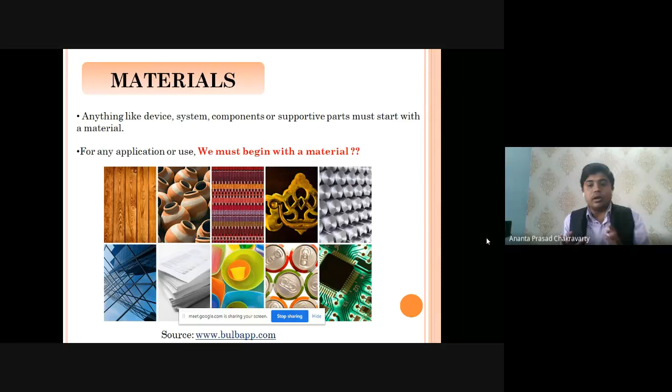So now let us begin today's topic, the emerging trend of research in material science. First of all, I must focus on material science and different classes of materials, basically for the graduating students. So first, what actually are materials? As I have told, to begin anything, you first have to search for a material. First, you have to choose your material. Then you have to select what design to give. Hence, material is the first criterion for us. Whether it is electronic, electrical, civil, infrastructure, or any kind of thing, you have to go for a material.

Now, what materials do you have to consider for different applications? First of all, you have to know the design criteria, in what applications you have to use it. Then what property do we need? Let us consider we have to construct a building. Then the roof must sustain a certain amount of load. Considering that, you have to choose your class of materials. Then the duration is important. You have to consider up to what duration you want it, and the safety factor.

It is a very crucial parameter, and environmental issues: in different environmental aspects like different humidity, high temperatures, or high to low temperatures or low to high temperatures, whether that material will sustain or not. So keeping this in mind, you have to think about what material you have to consider for which applications.

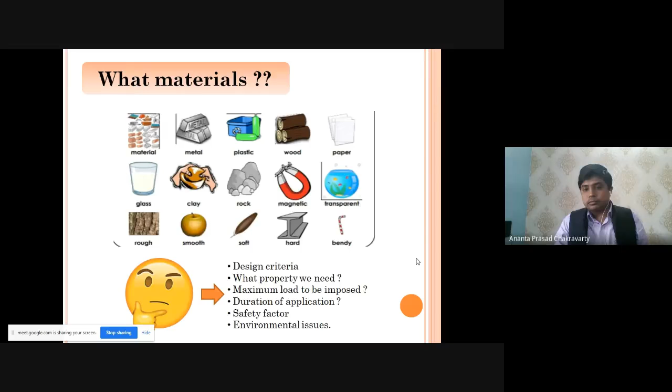Basic concepts of materials: it originated from the word matter. Matter is the substance or the mixture of substances that constitutes an object, and it may be from living or non-living matter. Materials can be classified with respect to their different physical or chemical properties, geological origin, or their biological function, their different appearance or their different availability. You can classify the materials.

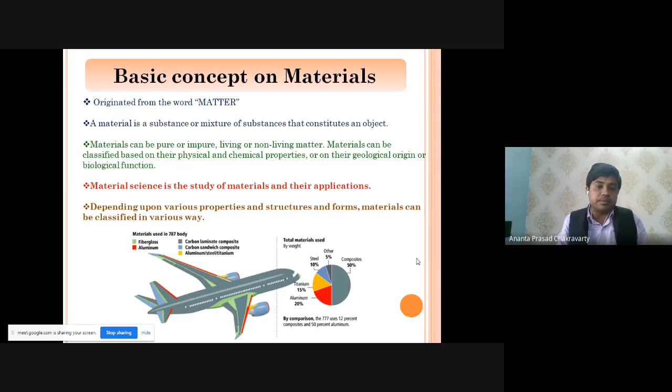So the study of materials is known as material science, and when you use these materials in different devices, that branch is known as materials engineering. So basically there is no such difference between materials engineering and material science. I have given a clear-cut figure of how much titanium, aluminum, steel, and other classes of materials are used in an aerospace body, in an aeroplane, keeping the different applications in mind.

So now we should classify the matter first, then we have to go for materials. Matter may be classified with respect to physical classifications like solids, liquids, gases. Basically we should focus on solid materials. Liquids and gases no doubt are materials, but I have not focused on them in my presentation.

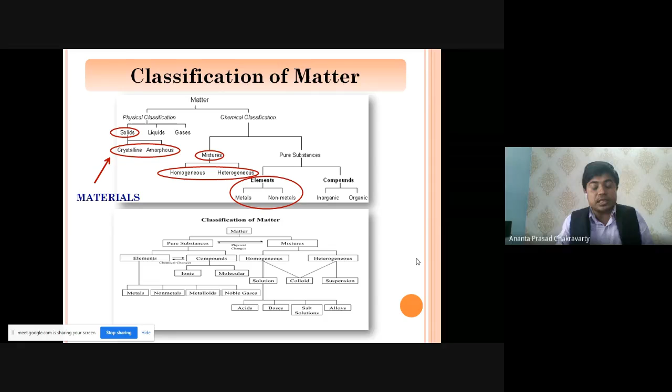Solids may be classified as crystalline and amorphous, and with respect to chemical classifications, materials may be classified as mixtures and pure substances. Mixtures may be homogeneous or heterogeneous, and in different classes of elements you may classify metals, non-metals, polymers, ceramics, etc., as our principal sir has already elaborated.

So now let us classify materials in a broad aspect: polymers, metals, and ceramics. Polymers are generally amorphous in nature; in the forthcoming slides I will explain what that is. Metals are crystalline, and ceramics are a mixture of amorphous and crystalline. When you mix all three, or two of those phases, in the required proportions, you reach composites, and those composites have better properties than conventional polymers, metals or ceramics.

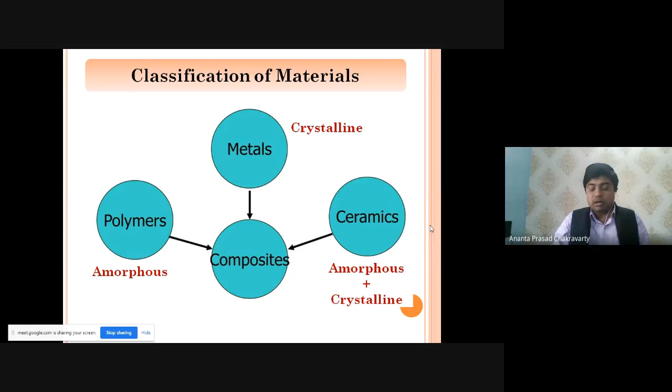Now, what are metals? Metals are generally crystalline in nature. In this case, the lattice arrangements are purely periodic. What are those lattice arrangements? All the atoms arrange in a periodic fashion; those are known as lattices. Lattices are of different types. I'm not going deeper into this; it is in your courses of study, or you may consult any book.

In crystalline materials we see one type of lattice arrangement, but in polycrystalline materials, different lattice arrangements collide and intermix, so they have their own boundaries, and those boundaries are known as grain boundaries. The example is quartz. In crystalline, the examples are sodium or any kind of metal.

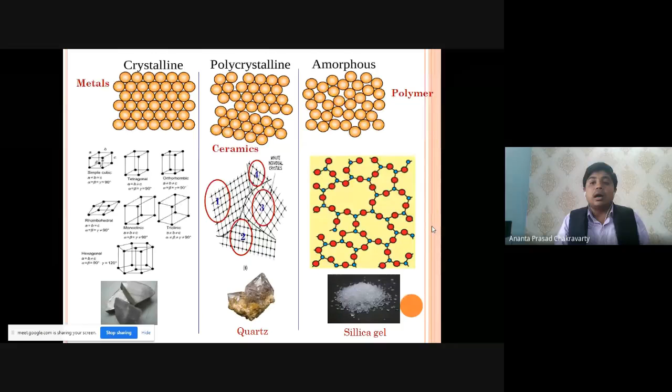In amorphous materials, there is no such lattice arrangement, and the atoms are cross-linked together to form a chain. These are polymers; we have different types, liquid state polymers, solid state polymers, and conducting polymers too, but basically they are cross-linked to give their overall solidification.

Now, if we construct a material tree, the branches will be metals, ceramics, polymers, and composites. The sub-branches of metals will be ferrous metals, originating from ferrous alloys like steels or cast irons. Similarly, other sub-branches will be aluminum alloys and copper alloys, and for different alloys you can assign their sub-branches, leaves, and properties.

Similarly, for ceramics, the sub-branches will be engineering ceramics like barium titanate, alumina, and different kinds of ceramics, and traditional ceramics like stone, porcelain, and quartz.

Similarly, polymers will be of thermosets, which generally cure permanently. Once it is cured, you cannot revert back to its original liquid state. Okay. Similarly, thermoplastics are cured partially. When it is cured and you want its liquid state, then you will give some heat or some temperature, and it will revert back to its original state.

Similarly, elastomers are also one of the branches of polymers. And mixing all of them in suitable combinations by some mixing rule, we will reach the material that is known as composites. When you keep the emphasis on metal, that is known as metal matrix composites. When you keep the emphasis on polymers, that will be polymer matrix composites. And if you give the emphasis to ceramics, those will be ceramic matrix composites. Basically, I will give importance to polymer matrix composites in part 2 of my presentation.

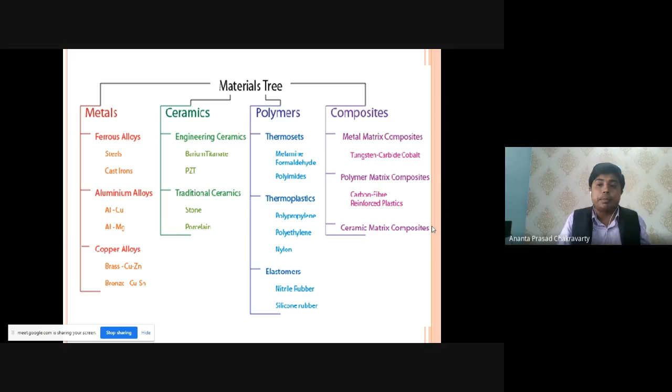Now let us get a glimpse of different classes of materials. Let us start with metals. These are generally polished, fractured, and have a lustrous appearance. These have high thermal and electrical conductivity. These are generally ductile and have high strength. And generally in our day-to-day life, we are using metals. Okay. And typically these are crystalline arrangements. Examples you can see in the slides: aluminum, iron, etc.

But the basic problem with metals is that they exhibit a catastrophic nature of failure. Catastrophic nature of failure means it fails instantly, and it does not give any warning. So during use you have to be very careful about it. Then it can corrode. When you keep a metal like iron outside in some environments, it has some corrosion. Then in metals, the very big trouble is the formation of cracks. You cannot avoid the formation of cracks. Then in extraction from mining, we cannot get pure metal. We get it in the form of ores, and it's a very difficult process to extract those metals. Mining processes are also very difficult.

So keeping this in mind, the emerging trend of research is to mix different metals to form alloys for different applications, like bronze and steels. All these are different alloys. And improvement of polishability is important so that it can be used, and its fracture strength must be improved so that no cracks are formed. And improvement of fatigue property.

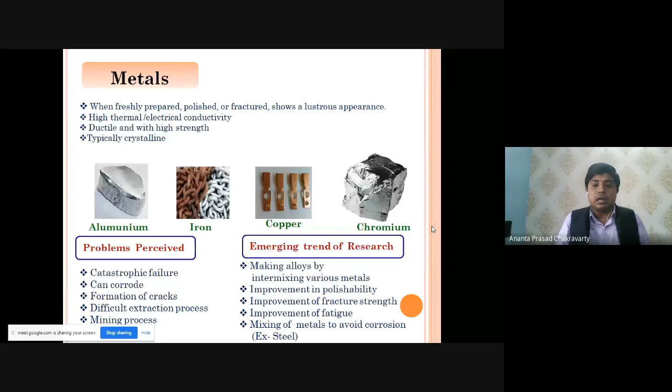What is fatigue? Whenever you are using a metal and giving some load, then after a certain time you unload it. The load is removed. Then you continue this cycle so many times. After a certain number of times, the metal will not respond to this cycle of loading and unloading, and at the end it will fail. That is known as fatigue. And you must not cross its endurance limit. So mixing of metals to avoid corrosion is also an emerging trend of research in metals.

Similarly, we come to ceramics. These are generally solid materials comprising inorganic compounds of metal or metalloid, and there are natural ceramics like earthenware, porcelain, bricks, and ceramic bricks you are using, and these are generally brittle in nature. They break immediately. High Young's modulus, high strength, high corrosion resistance, it will never corrode, and high thermal resistance also. For this reason, ceramics are used in blast furnace applications. They have very low electrical conductivity and low thermal conductivity. Hence, in some furnaces, ceramic parts are used for insulating purposes.

They are amorphous and polycrystalline in nature. Different examples are silica, alumina, zirconia, silicon carbide. Here also you may face the problem of catastrophic nature of failure. It can break easily, with formation of cracks. You have to avoid all those things by some research. You have to mix some metals with the ceramic so that the ceramic can sustain. Then you have to avoid formation of interconnected cracks, and you have to improve its fracture strength,

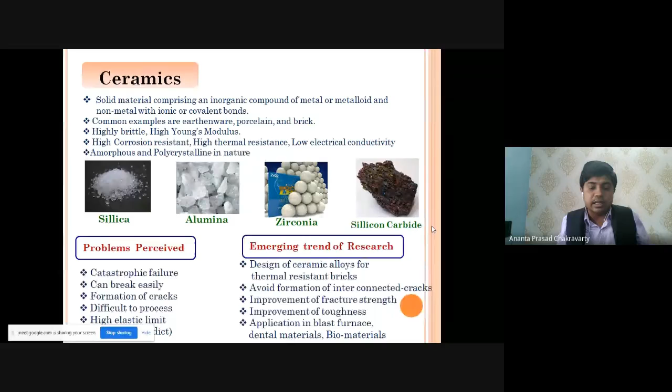its toughness, and basically how these ceramics will be used in biomaterials and dental materials. These are related to biotechnology, and botany and zoology people can research in this area. So these are some basic research areas in ceramics. Now the polymers.

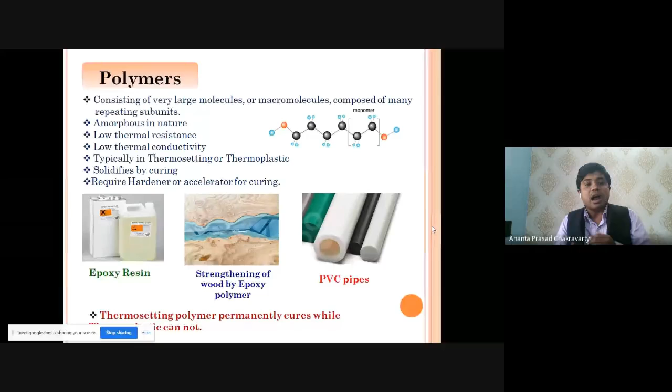Now, advantages with polymers: these are very good adhesives. These are also very good coating materials, and you can process polymers easily. You can apply them anywhere, like with a brush. Less maintenance cost, they will never corrode, and very high life cycles.

Now, the disadvantage is that polymers generally absorb moisture, and moisture is the big detrimental factor for polymers: they swell, and through the process of hydrolysis they degrade. These have low elastic modulus and low glass transition temperature, which is generally known as the maximum service temperature, after which the polymers generally plasticize and give plastic property, and the yield strength, strength and sustainability also decrease.

Low processing time, cracking; after curing, hardening or solidification, these generally break under high amounts of load. So you have to go for the design stress, up to what amount of stress or load you have to use it.

So keeping this in mind, the emerging trend is how the moisture can be removed, or how we will design polymers. They should absorb very low moisture content, having high mechanical property, conducting property, high glass transition temperature, and you have to mix some ceramics or metals in polymers to have better composites for better properties, and those can be used in various structural and civil infrastructure applications.

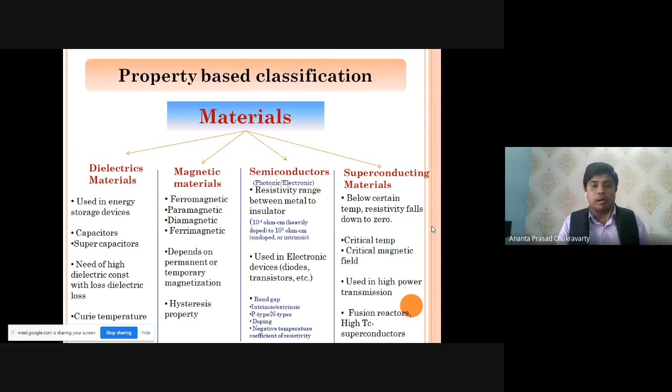School level students know what Coulomb's law is. And Hendrik L. Lorentz for the Lorentz theory, which is also the modification of electromagnetic theory in relativity. They have given their valuable time, and using these theories we can classify the materials. Now let us start with the dielectric materials.

Dielectrics are electrical insulators, and whenever you apply an electric field they can be polarized, meaning that dipoles are oriented in a proper direction. That is known as dielectric polarization. With respect to different extents of dielectric polarization, you can use these dielectrics in capacitor plates, and you can also change the capacitance by changing these dielectrics, and reduce the possibility of shorting out by sparking during high voltages. So applications will be in capacitors, transformers and different applications.

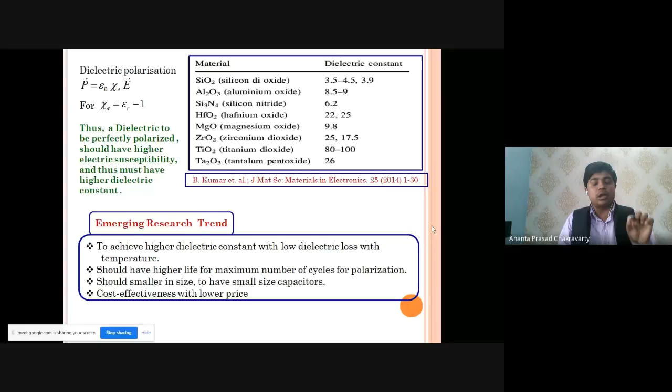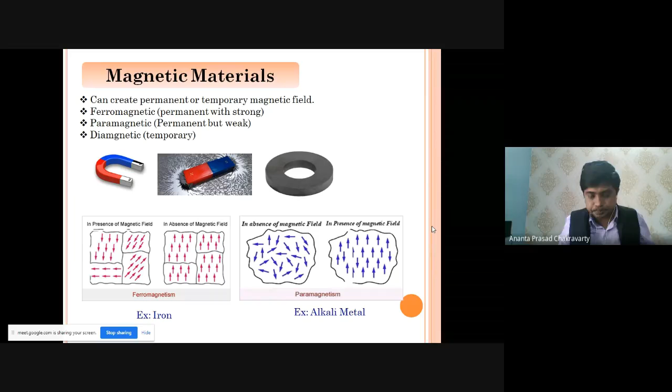Similarly, if we come back to magnetic materials, they can create permanent or temporary magnetic fields. That may be ferromagnetic, permanent and strong; paramagnetic, permanent but weak; and diamagnetic, which is temporary. So you can classify different classes of magnetic materials. For ferromagnetic, below critical temperature, their spin vectors are aligned parallel in magnetic domains. For antiferromagnetic, their spin vectors are aligned antiparallel. For ferrimagnetic, the spin vectors are aligned antiparallel but do not cancel. And in paramagnetic, spin vectors are randomly oriented.

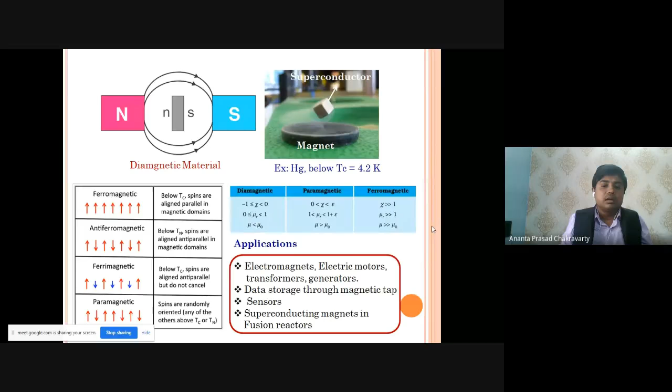Keeping this in mind, you can use them in electromagnets, electric motors, transformers, data storage in magnetic tape, sensors, and superconducting magnets in fusion reactors. And the hysteresis loop plays a very crucial role for magnetic materials. Whenever you start from the origin, where you have not applied a magnetic field, and then apply the magnetic field, it will give an S-type of cycle.

This hysteresis loop can be measured with different equipment, and there are some emerging research trends: you have to achieve uniform magnetization at various temperatures, and critical temperatures must be improved so that a magnetic material can be sustained up to very high temperatures. Particle size or grain size must be smaller with higher magnetic polarization, and to prepare magnetic materials, the intermixture of various non-magnetic materials must be considered. How to prepare those mixtures is also an emerging research trend, and it is obviously challenging to prepare sensors using magnetic materials.

Now we reach superconductors. When you cool a normal conductor, for some specific materials, not all classes of conductors, like mercury, below 4.2 Kelvin its resistivity will decrease to zero, and below that temperature its conductivity will be very high, practically infinite. Hence these are known as superconducting materials. They exhibit the Meissner effect, meaning below the critical temperature they exclude the magnetic field completely, and they are used in fusion magnets, power transmission, superconducting sensors, etc.

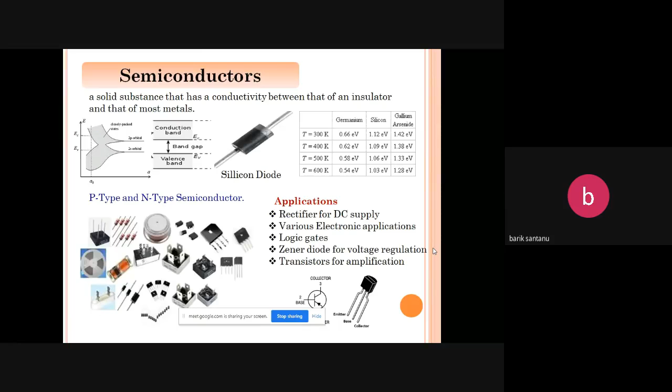Sir, screen dekha jauni screen. Excuse me, sir. Dekha jauni screen. Screen already it is stopped sharing. It is Sukanti madam. Should I stop and share it again? Let us, I should stop and share again. It is clearly visible. Now the screen is visible. Yes, sir, it is visible, audible and visible. Okay, thank you, sir. Those who cannot see the screen may ping out so that the screen can be visible.

I hope so. Then in applications, by combining those p-type and n-type materials, you have the p-n junction diodes. Those are known as rectifiers. In day-to-day life we are using them to charge our mobile phones; those charging devices are actually rectifiers. Similarly, transistors, field effect transistors, and different classes of logic gate materials are generated from these semiconductors. And without semiconductors, your electronic devices would not be possible.

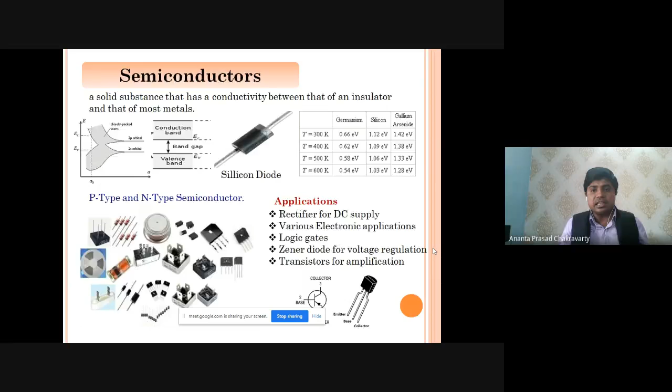So, hence, the emerging trend of research will demand semiconducting materials with lower band gap, lower resistivity, smaller size, some luminescence, high light cycles, and very good responses towards transitions. Then there is another class of materials known as optical materials. These are also semiconducting materials. I have not mentioned them in the list, but these have optical properties.

Whenever you give some light, there will be some transitions. From valence band to conduction band, the charged particles will transit. They will be excited. This is known as photonic excitement. Photon is the particle associated with light, and hence it is known as photonic excitement. For this kind of property, those materials are known as photonic materials, or optical materials. And these materials have direct band gap property. What is direct band gap?

Now you can see in the figure, this is the valence band, and this is the conduction band. All the holes will be here, already densified, and here all the electrons will be densified. All these valence band and conduction band are at the same energy state. But see the second figure: the maximum peak of the valence band and the minimum peak of the conduction band are at different energy states. Generally optical materials exhibit this kind of graph, that is, direct band gap property.

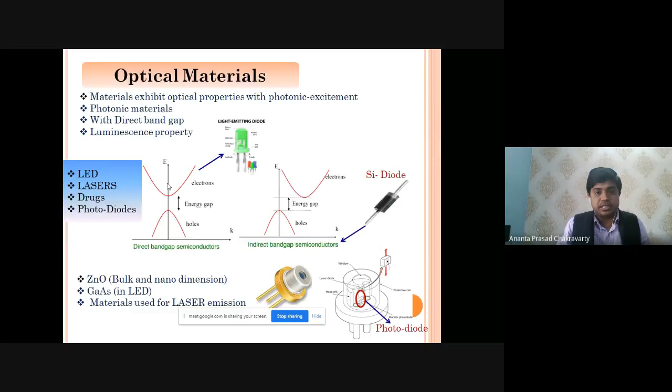I have already shown that you can use a UV-visible spectrometer to get the graph of absorbance versus energy. At a certain energy your absorbance will show greater transitions, and by finding the tangent to the x-axis, that point is known as the band gap, optical band gap or direct band gap of that material.

Whenever that direct band gap is, let us say, 3.2 electron volt, you have to give light of 3.2 electron volt. When you give light of energy 3.2 electron volt, the material will behave as a semiconducting material. So hence you have to enhance its photonic band gap, meaning the band gap must be reduced, and various lasing materials have to be in the pipeline for research. People are searching many materials to give the cheapest lasers.

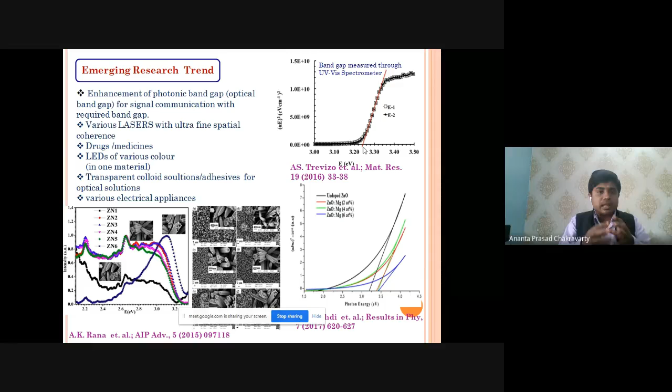Drugs, medicines, light emitting diodes for a single material with different colors, and transparent colloid solutions and adhesives, so that whenever you are jointing some lenses, like Canada balsam, it has some transparent properties, and various electrical appliances also. And I have cited so many kinds of things.

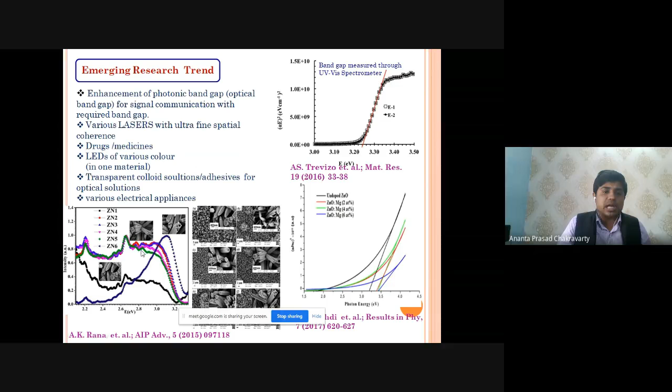See this diagram, at my mouse pointer. You can see that whenever you add zinc oxide with magnesium at 6 percentage, the blue line, its band gap will be improved. Its band gap is increased. And as you know, in the different kinds of microstructures for zinc oxide, you have different luminescence properties, and with a different luminescence property you can use that zinc oxide for different electrical applications. So what you need, you have to go for. That is the basic art of material science.

So now you can classify materials with respect to their particle size also. When their particle size is beyond 100 nanometer, that is known as bulk phase materials. When your particle size is less than 100 nanometer, that is known as nanomaterials. You can see barium titanate in bulk phase and in nano phase, and in nano phase its hardness and all its mechanical properties, electrical properties, optical properties are greater with respect to bulk phase. Hence it is better, we must go with nano phase materials.

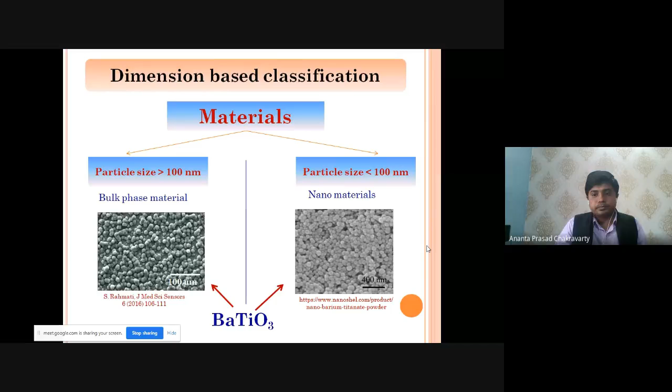Now you can classify nanomaterials with respect to different dimensions. First of all, you can fabricate nanomaterials by segmenting a bigger material into smaller and smaller sizes. That is known as the top-down approach. And also you can join very small materials or atomic level materials up to the 100 nanometer range, that is known as the bottom-up approach.

Keeping this in mind, when the material dimension is limited to a point, that is known as quantum dots or clusters or zero D. When the material dimension is confined to one axis, x axis or y axis, those are known as one dimensional materials. Examples are nanotubes, nanorods, nanowires. Similarly, when the nano dimension is confined to some thickness in x and y, that is known as two-dimensional nanomaterials, known as nanofilms or nano coatings.

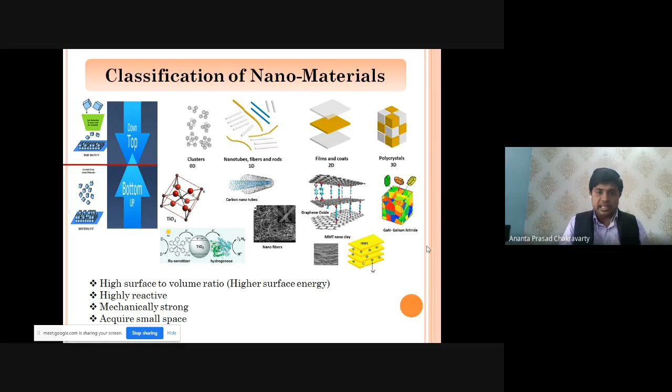Similarly, if the nano dimension is confined to three dimensions, that is known as polycrystalline nanomaterials or bulk phase nanomaterials, that you can grow for whatever applications you need. In that way, you have to go for the dimensions and for those techniques to fabricate nanomaterials.

So now the important classes of nanomaterials are carbon nanotubes, where the carbons are bonded in such a manner that they form a tube. Similarly, in a bigger tube a smaller tube, then in the smaller tube another, just imagine, that is known as multi-walled carbon nanotube, and if it is only a single cylinder, that is known as single-walled carbon nanotube. Similarly, if we cut one part of the carbon nanotube, it will be a sheet, and that is known as graphene sheet.

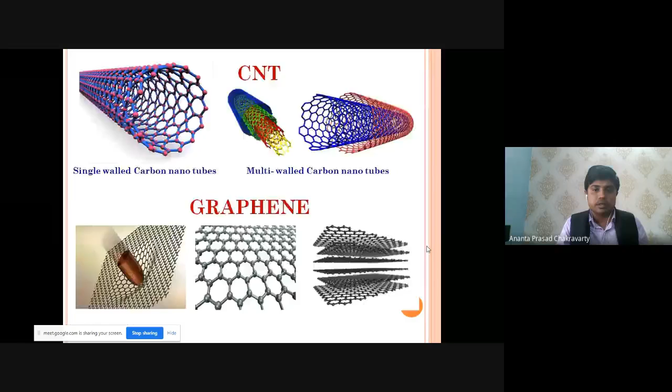It is so hard that a single atomic layer of graphene can sustain more than 1 ton of load. That is a very important emerging class of materials. Now people are going for it. So in the emerging trend of nanomaterials, people research to generate nanodielectrics, nanomagnetic materials, every kind of material in nano dimensions. And hence nanotechnology is just a blessing for the material scientist.

Now we have to go for another class of materials. Those are very important classes of materials, known as nuclear materials. Nuclear materials can emit radiations. These are by nature, and different radiations are there: alpha particle radiations, beta radiations, which are generally electrons, and gamma radiations, which are electromagnetic waves.

And in the periodic table I have shown the radiation cycle of uranium and how it will radiate, and at a certain time interval its mass will be decreased. That is signified by its half-life period, that is 0.693 by lambda. Lambda is its rate constant.

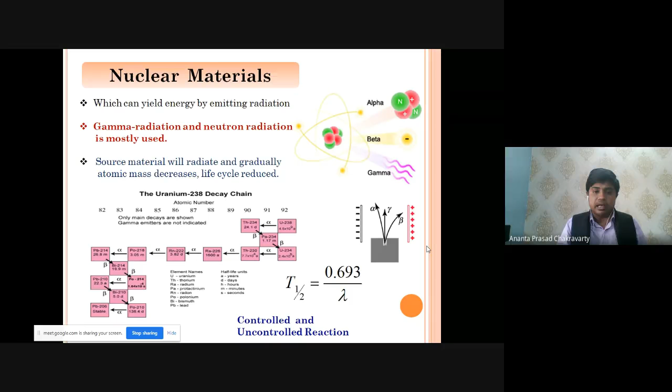So with this kind of materials, you can produce X-rays, lasers, plasma, gamma radiations, neutron radiations, and these classes of materials are used in reactors to produce electricity. In the emerging research trend, you have to design this kind of material with very optimum safety factors, because it may be hazardous for your health also.

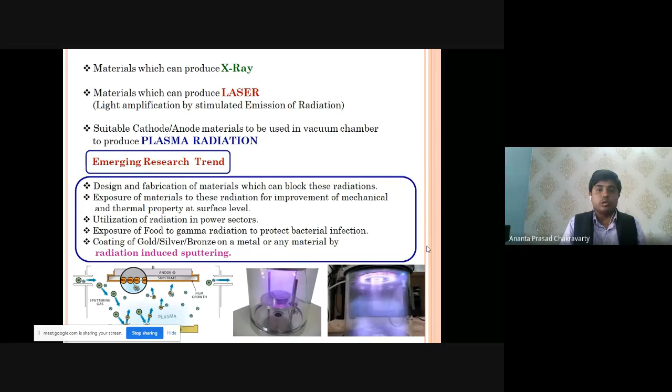Then people are searching how we have to block these radiations, but we have to keep a research on these classes of materials. That is also a very important class of materials. Plasma is also one kind; you can generate the cathodes and anodes so that plasma can be generated. Those are also in the classes of nuclear or radiating materials.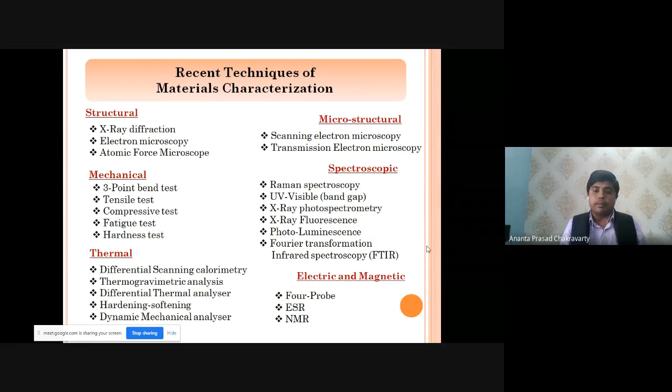Now let us begin with part 2 of my presentation, that is an emphasis on polymer composites. That is my research area; I have given my time to polymer composites from my MTech and PhD, and nowadays I am continuing with this kind of activities. Now, basic concept of composite materials. What are composite materials? We have to know. Already I have told it.

If different classes of materials are mixed together with a clear-cut interface, then the main part of the material, known as matrix, will give you some shape and size, and the other part, which will enhance the strength or property of that material in any way, is known as reinforcement, because it reinforces its properties. When these classes of materials come together with an interface, they are not alloys. They have a certain interface; that is known as composites. For example, concrete, cement plus sand plus rock, is a composite. Similarly, brick, soil plus sand, is also a composite. In wood, cellulose plus lignin, those are also composites.

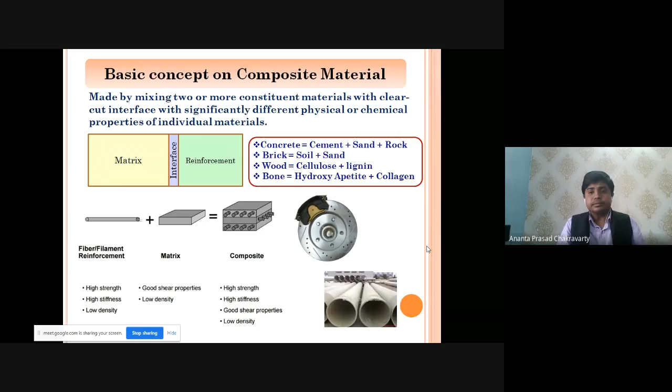Now these are some components of the composite, matrix and reinforcements. Already I have told you what properties the matrix should exhibit and what properties the reinforcement should exhibit. Generally reinforcement should have better strength than the matrix. So whenever you are using polymer, which is softer in nature, you have to choose either metal or ceramics for the reinforcement. Whenever you are choosing metal as a matrix, the higher strength material than metal is ceramics. You have to choose only ceramics.

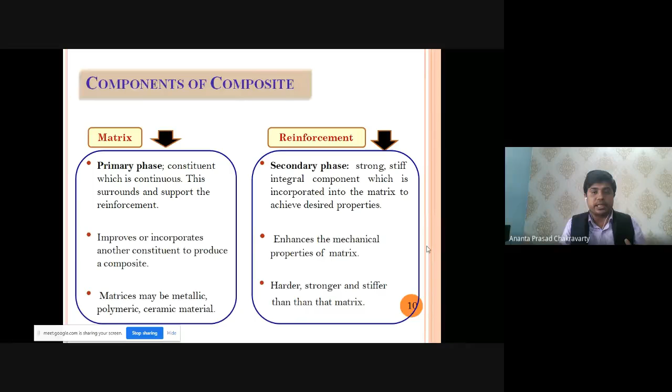So in this way, there is a rule of mixture. There is a mixing rule. Keeping that in mind, you have to mix at an optimum percentage, so that the composite material will give you the optimum strength and desired properties for that component. Now composites can be classified with respect to different kinds of matrices: polymer matrix composites, metal matrix composites, and ceramic matrix composites.

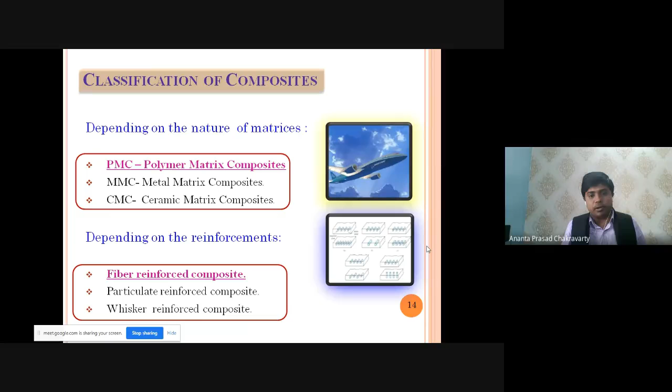I'll put emphasis on polymer matrix composites, and depending on reinforcements, it may be fiber reinforced composite, particulate reinforced composite, and whisker reinforced composites. So now the matrix may be metallic like aluminum, magnesium, titanium, or it may be ceramic: silicon carbide, silicon nitride, alumina, zirconia. The matrix may be polymer. So when you are choosing polymer as a matrix, you have to choose the upper classes of materials, metallic or ceramic materials, as their reinforcements.

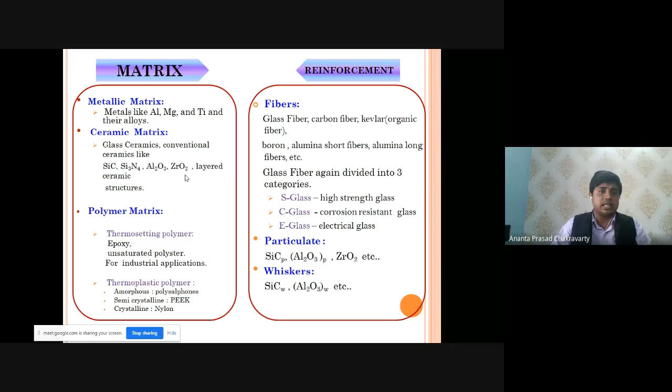And reinforcements may be in different sizes, like fibers, particles, or short fibers. So whenever you are choosing polymer as a matrix material, that is known as polymer matrix composites. Then in this case, you have to choose basically a ceramic as the reinforcing material. So in ceramics, you may choose particles or fiber form. So basically, I have taken the reinforcements of ceramics in fiber form. Hence, it is known as fiber reinforced polymer composites, that is, FRP composites.

So here, fibers may be taken from glass, carbon, Kevlar or alumina. So different classes of fibers you may fabricate and incorporate in the polymer to have better properties. Just see the stress strain diagram of a composite material. The blue dotted line is for matrix. See how very minimum strength, the cross mark is here, how much lesser strength the matrix has. And see the sole reinforcement, how brittle it is. It is a stiffer diagram, there is no plastic deformation, so it may break anywhere.

But whenever you are combining these materials of the red stress strain diagram and the blue stress strain diagram, it is giving the intermediate stress strain diagram between red and blue, that is the green. The strength is quite decreased, but its ductility is improved, its yield strength is also improved, and with certain plastic deformation points, so it has improved properties over the fibers and the matrix. So that means composites have improved properties over the fibers, or the reinforcements, or the matrix.

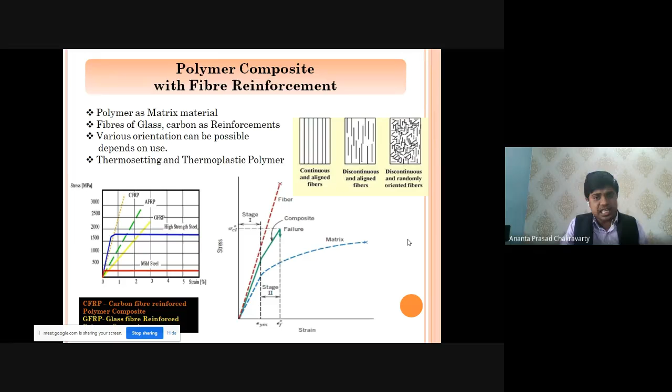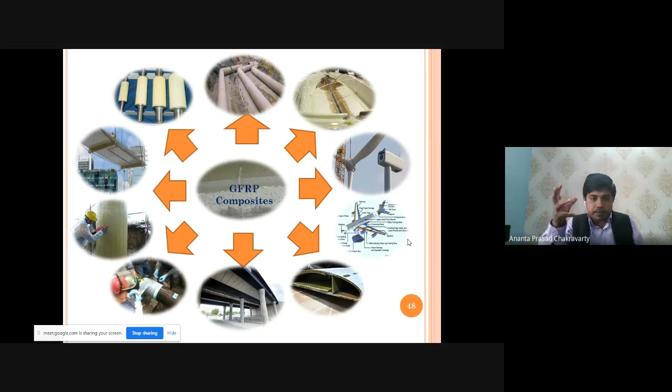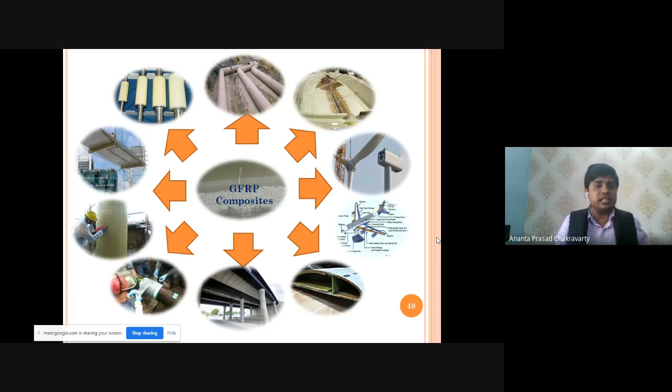Now my research area is glass fiber reinforced polymer composites. These are used in various applications like pipelines and marine applications, wind turbines, wind blades, the maintenance of pipes by GFRP composite wrappings, maintenance of bridges, maintenance of boats, in marine and ship bodies, aerospace bodies, and also the insulating sheets of superconducting magnets. All these multi-purpose applications of this single material, known as glass fiber reinforced polymer composites. So these polymer composites are very light in weight and very highly corrosion resistant.

It will never corrode, greater life cycle, that means greater fatigue cycle, and non-catastrophic nature of failure, because whenever it fails, it will give a stretch mark, known as scratching. So that is an indication of failure. At that time, you have to reject the material. That means it will give a pre-warning of the failure. Then greater toughness, so light and so strong. So that means light in weight and it will never break.

So let us consider any material can sustain 50 kg of load. But if you give 51 kg of load, it must break. So this kind of material, let us say GFRP composites having 50 kg of load sustainability, can sustain up to a maximum design stress of 70 kg or 80 kg. That means you can increase its load sustainability. Hence it has greater toughness, ease of fabrication and low maintenance cost.

But the basic problem is that these polymer composites, so to say fiber reinforced polymer composites, their mechanical properties and thermal properties can decrease in a moisture environment or high temperature environment. And curing is a very big problem for us. It is a very crucial problem for us.

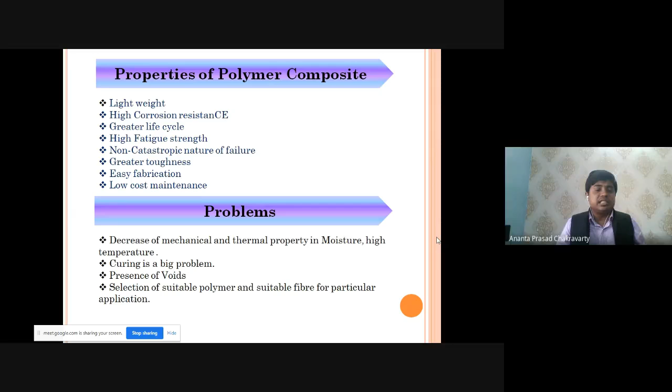We cannot achieve ultimate or optimum curing for that polymer, so that material cannot be hardened up to our desired extent. Presence of voids and selection of suitable polymers or suitable fibers for different classes of materials. Keeping this in mind, I have fabricated these materials and exposed them to a humid atmosphere, that is water immersion, and an environment where moisture is there with high temperatures.

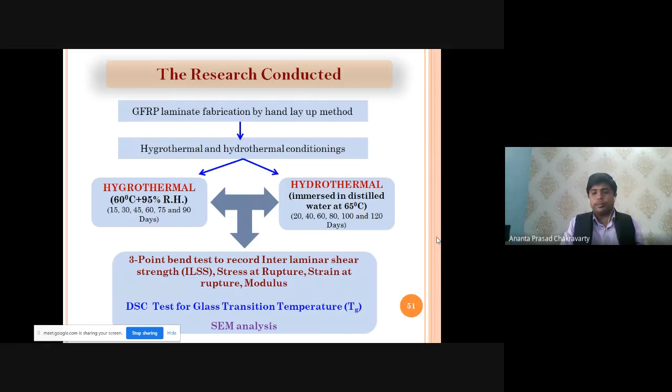So at that temperature, I expected effects like plasticization, swelling, and hydrolysis, so that the polymer can be deteriorated. So I have exposed the materials to these environments, and I have studied its mechanical property, thermal property, and microstructural property. See, moisture gain will be improved, and after certain days of moisture, it has a plateau trend. That means a constant trend, so up to that level of moisture, that level of decrease of strength can be tolerated up to the design stress levels.

Hence, its ILSS, that is interlaminar shear strength, decreases. Why shear strength? Because I have taken glass fibers and polymers in layers. So when I apply the load, those layers will have relative motion. In that relative motion, there is shearing. The lower part has tensile and the upper part has compressive loads. Hence, those are shearing kinds of loads. So I have to know its resistance to shearing, among the layers, how much shearing strength can be sustained; that is known as interlaminar shear strength.

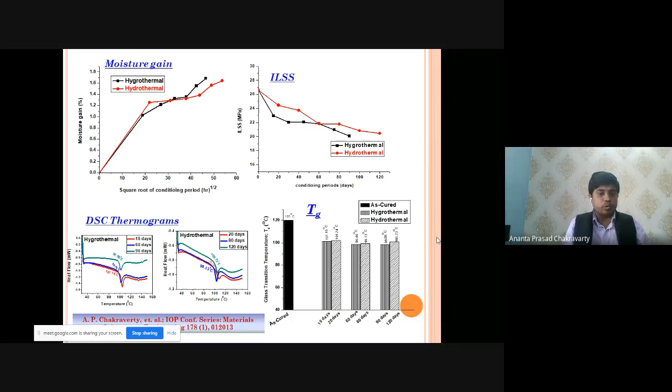It is a crucial parameter for FRP composites, and it decreases up to a certain extent, and at that design stage, you have to fabricate your composite materials so that they can be applied in aerospace or in applications where moisture is there. Similarly, thermal properties decrease up to a certain percentage, and at that design stage, at that level of glass transition temperature, you have to go for its fabrication. And in its micrographs, you can see how materials break by fiber breaking, polymer cracking, and fibers being pulled out. So in that way, your microstructures can be understood.

Similarly, I have fabricated glass fiber and polymer composites and exposed them to seawater. Why seawater? Because in marine environments, glass fiber reinforced polymer composites will never corrode. If it never corrodes, it can be used for many years in a sea environment or immersed in sea. So keeping this in mind, I have taken GFRP, glass fiber reinforced polymer, with epoxy resin as the polymer, and up to 12 months I have exposed it at room temperature, and studied its moisture gain, mechanical properties, thermal properties, elemental properties, and microstructural properties. So you can see the moisture gain increases, at a certain level of days it is constant, and after which it again increases.

That means I have to use the material in these durations. Beyond these durations I cannot use it. Okay, these are very small materials I have fabricated. But if I increase its dimensions and its layers, then its sustainability capacity will increase, maybe up to 5 years or 6 years or maybe up to 10 years. Similarly, its interlaminar shear strength decreases up to 23% after 1 year. That means I have to keep in mind its design stress, so I will improve its design stress up to 23%, so that materials can be used in seawater with sustainable performance.

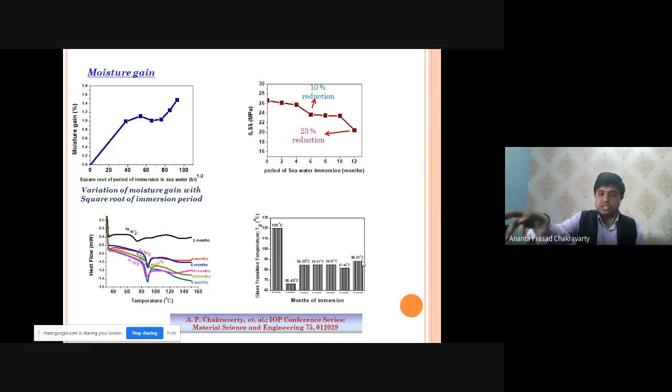And I have studied the glass transition temperature by differential scanning calorimetry. After 1 year, that temperature is 88.21 degrees centigrade from 120 degrees centigrade. That means up to 80 degrees centigrade that material can sustain in sea. Okay, I can use it up to 1 year. Now I have chosen the elemental study. In that elemental study, I can see that up to 1 year calcium penetrates more into the materials and deposits across the interface, so its calcium percentage at the surface will be greater, and it is not allowing the moisture. So after 1 year, it is giving sustainable performance.

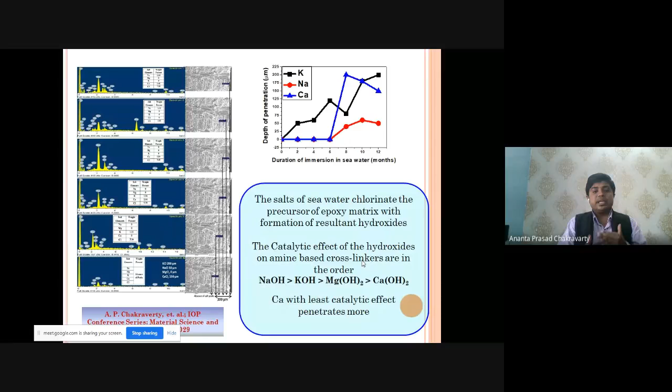Now scanning electron micrographs after 1 year show that the fiber will not be broken, but the matrix will be cracked.

That means it is so stupendous, so strong, that all the loads have been transferred to the matrix, so that the matrix will be cracked, but the fibers do not have a single fracture or single crack or breakage, as you have seen. That means the material can sustain in seawater in a very effective sense.

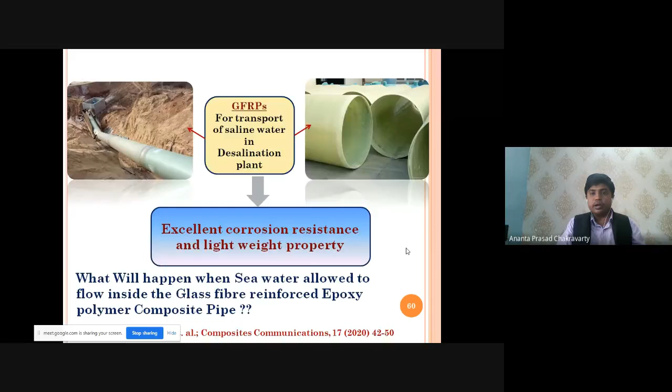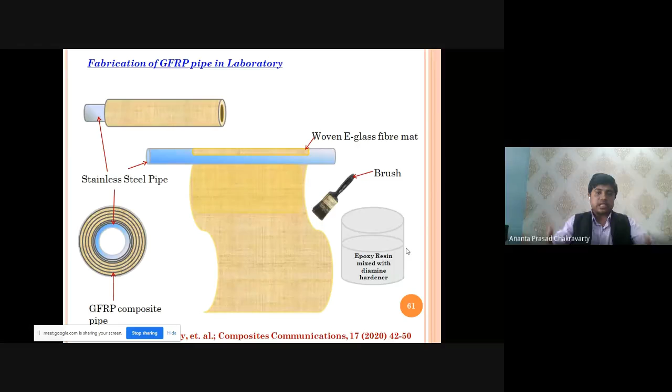So now this glass fiber reinforced polymer composite, with very excellent corrosion resistance, can be used as piping material, pipes, so that seawater can run inside it. It can flow inside it. Hence I have fabricated a glass fiber reinforced epoxy pipe by this method: I have taken a stainless steel pipe, then wound the glass fibers over it, then applied the polymer, then hardened it.

Because in deserts and near sea environments, people must have a desalination plant, and they have to procure the seawater and desalinate it, then recover that desalinated water for drinking purposes. How could they do this? Previously, they did this with steel pipes or metallic pipes, but generally after 1 year those metal pipes get corroded. These materials will never corrode. So keeping this in mind, I have fabricated these pipes and allowed seawater to run inside them for 1 year.

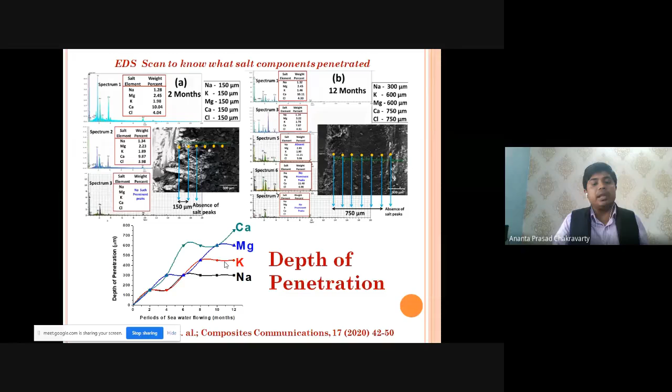Now, why is it improved? Generally, with moisture, properties should decrease, but here it is improved, in a very slow, continuous manner, in a very low quantitative aspect. So hence I have gone for elemental mapping of the surface of the pipes. I can see the salts: calcium, magnesium, potassium, and sodium, with calcium penetrating more and sodium penetrating very less. And I have gone for Fourier transform infrared spectroscopy.

At 1 year, I can see some additional groups, amide or aromatic ketones and carbonyl groups, forming due to some additional polymeric or organic functional compounds, and those are packing inside it and giving strength to the material. Similarly, by XPS analysis, I can see which salts and how much of them are associated.

So hence I have studied the mechanisms by taking the used seawater and doing a fluorescence study, and concluded that sodium to a great extent will be deposited at the surface, and there will be some bacteria forming in favor of sodium, using sodium as nutrients, and these bacteria will lock the salts, so more salts will be blocked at the surface, so that after 1 year no moisture is going into it, and hence its mechanical properties are maintained or stagnant, so we can use it beyond 1 year.

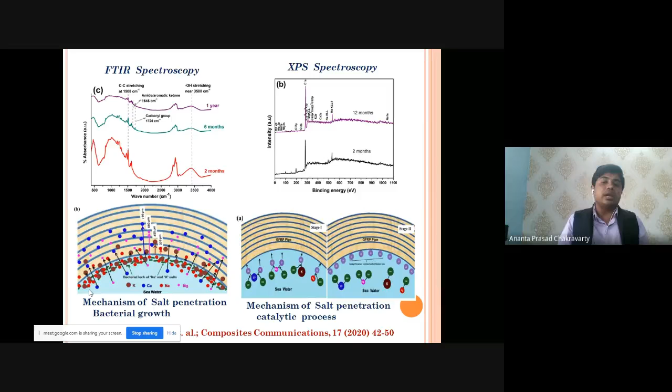And you can see that after 1 year all the fibers are bunched, and all these bunched fibers provide the optimum strength to the material so that it can be used.

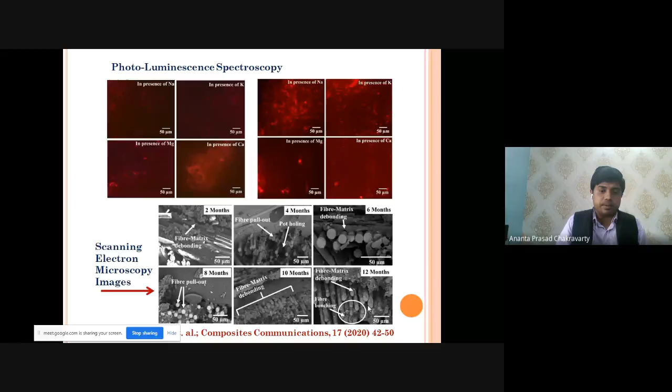Hence this is published in a very reputed journal, Composites Communications, in 2020. Now these glass fiber reinforced composites can be used as electrical and thermal insulators in superconducting materials. Keeping this in mind, I first fabricated these materials, then exposed them to gamma irradiation, and I conducted this experiment in BARC, Bhabha Atomic Research Center, Mumbai, for low intensity and high intensity.

At low intensity the strength decreased, and at high intensity its strength improved. From that I concluded that maybe at high intensity doses the polymer may be cured to the desired extent so that its strength is improved. Similarly, the glass transition temperatures at high intensity doses are greater than at low intensity doses, and the composite exhibits a color change with very good strength.

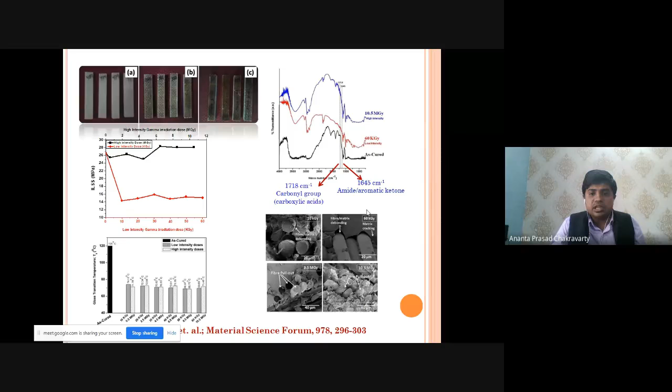Then I went for FTIR analysis, Fourier transform infrared spectroscopy, and at a certain wave number zone some additional oligomers appear. Oligomers are small molecular weight polymers. These are formed with amide and ketone groups, and these help a lot for curing. Hence, at the high intensity dose, you can see all the fibers getting together and fewer fractures. But at the low intensity dose, you can see fibers getting delaminated and matrix failure.

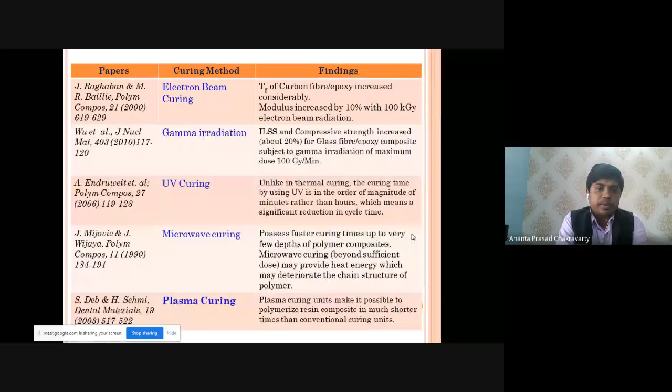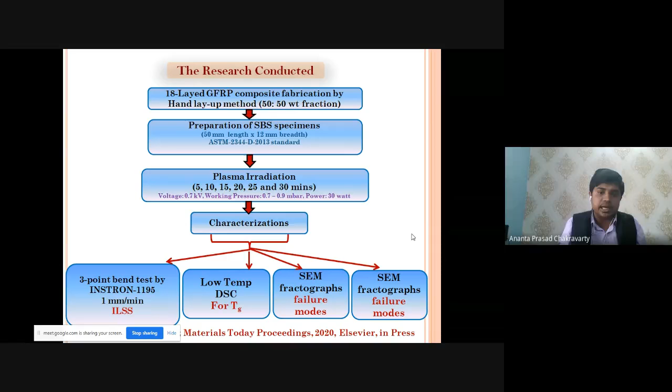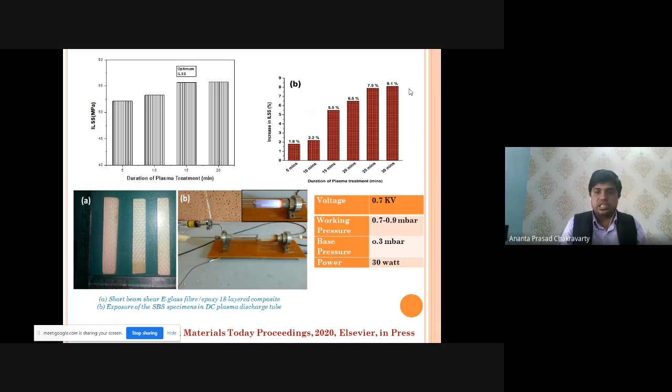These components are also very important in achieving ultimate curing strength. So with respect to different curing methods like electron beam curing, gamma irradiation, ultraviolet curing, microwave curing, and plasma curing from different researchers, I have gone for plasma curing. This experiment was conducted at C.V. Raman Global University, and I exposed these materials up to 30 minutes of plasma irradiation, and the interlaminar shear strength improved considerably in a very limited time, around an 8.1% increase with 30 minutes of plasma exposure.

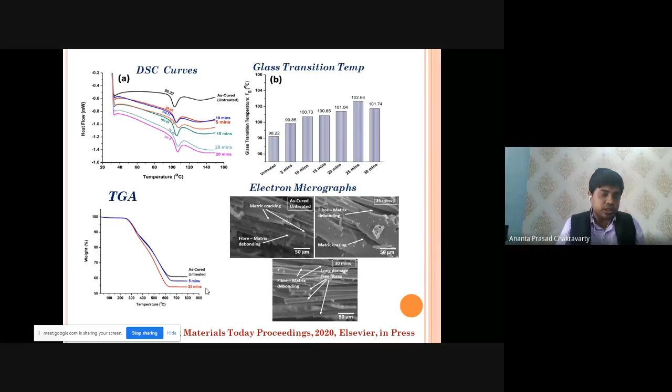At 25 minutes of plasma exposure, the glass transition temperature increased considerably. You can see that at 25 minutes the failures are less, no failures visible, only matrix cracking and fiber matrix debonding. And thermogravimetric analysis shows the maximum weight loss at 25 minutes, and in that case I can claim that if I give plasma radiation to these glass fiber and polymer composites, the strength is enormously improved.

Similarly, I designed these composites and exposed them in a normal environment, like at the rooftop, for up to 3 months. Up to 60 days the moisture gain increases, but at 30 to 40 days the strength is at a maximum and it is increased for different volume fractions of fibers. I can conclude that these composites also sustain natural environmental exposures, where crucial moisture exposure and temperature fluctuations are present. This experiment was carried out in Bhubaneswar.

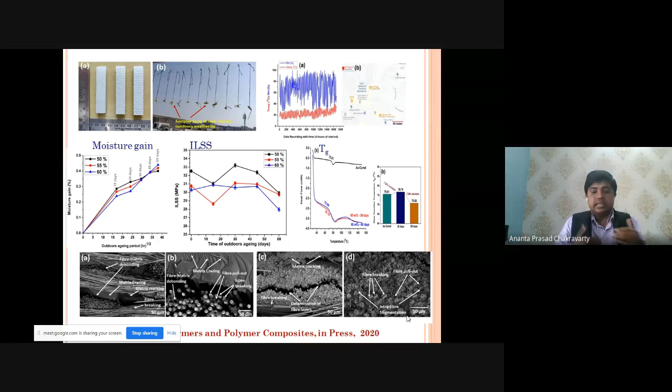The Google map image is also attached here. At the optimum percentage of fibers, you can see failures are less, fibers are stacked together, and their properties are enhanced. So keeping this in mind, again I wanted to improve its properties with respect to additional curing techniques.

Then I added nanomaterials like graphene oxide up to 0.05%, which is very little compared to the overall weight of the materials, and I can see a 20% increase, and the glass transition temperature increased up to 1.88%. But when I expose these materials to sea water, in presence of graphene oxide the strength decreases only 24.48%, but without graphene oxide the strength decreases 35%. See how sustainability is improved with the addition of 0.05% graphene oxide.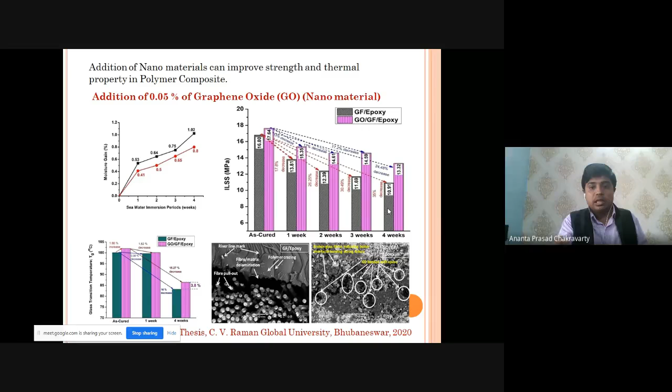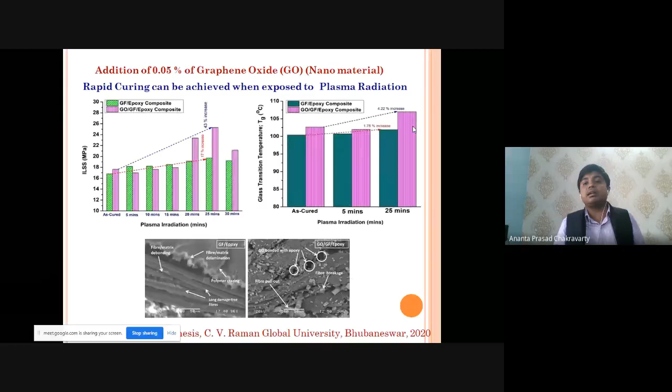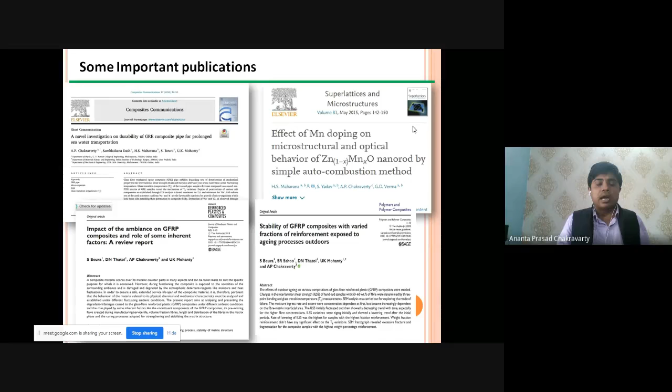Any physics or chemistry students may collaborate with me to have very good research in it. These are my awards and achievements I have gained. This is my Google Scholar screenshot for the research papers published, and these are some screenshots of my important papers, some high impact factor papers I have published in very reputed Scopus and Web of Science journals.

And who can collaborate with me? Well, all the faculties, researchers, industry persons who may be interested in polymer composites or their properties, or curing, or nanomaterials, or incorporation of nanomaterials in polymer composites or nano hybrid composites. Those interested people can collaborate with me.